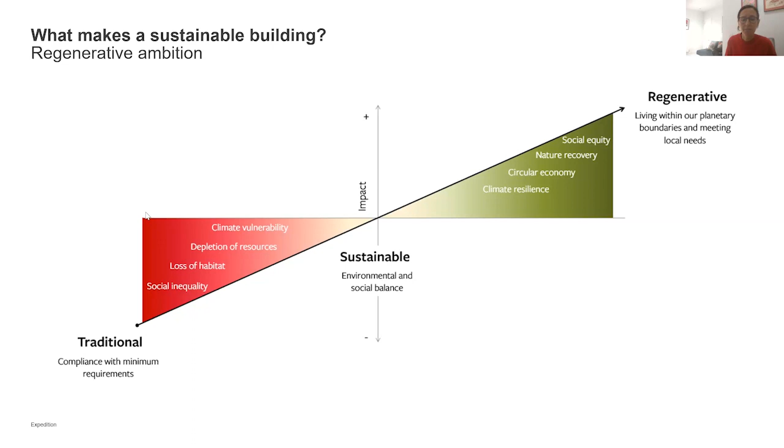those attributes in practice. And yes, we had a great design, but we also had a really strong client that put sustainability at the heart of what they wanted to do and achieve through this building. We had the funding in place to enable us to do it, and we had the local environment and the local conditions as well. We then had a really good contractor as well that built the building in accordance with our design intent, and that was supported by a soft landings process where we had the asset owner engaged with the design, and we had very good commissioning processes.

And if you go into the building today, it does perform pretty much as we had envisaged, and it's low carbon. It performs even better than we expected. But it was also delivered in a different era. And I think one of the points that I wanted to make now is, in some of the discussions that I'm having around new projects, we're being increasingly pressed on cost pressures, on procurement pressures. And so how do we make sure that we can continue to design and deliver sustainable buildings in the current economic and geopolitical climate? And I'll give you an example of a project.

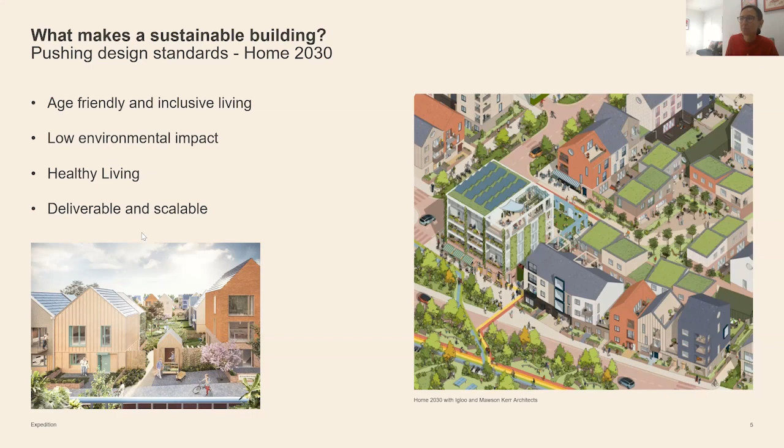And so we came up with a proposition which by far meets the Future Homes Standard and is very much aligned with things like LETI, which are the industry view on what energy performance and embodied energy should look like in 2030, which you may be familiar with. We were fortunate to win that competition, along with another team, and we're now in the process of building those prototype homes within the context of Riverside, Sunderland. It's a master plan which is regenerating the city of Sunderland, and this will go into the first phase of

development. But it's only when the rubber hits the road, when you get into the procurement process, that you start to understand how these things are going to be delivered. And we've encountered some issues on the way, translating our design intent into a built product. And those issues are to do with making sure we've got the right product insurance certifications, building insurances. We've had some cost issues as the cost of materials and the cost of living more generally has gone up that we're now having to work through.

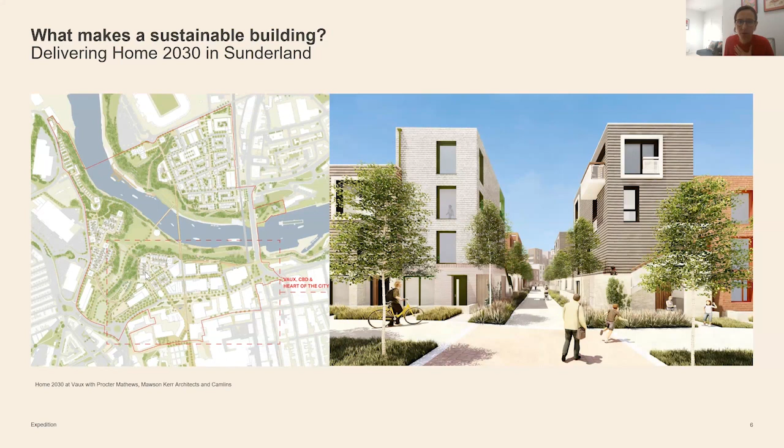So whilst the subject of this presentation is about design of new buildings, I think as a good designer, you have to think about how each component of your building is going to be delivered. And then the other point I wanted to make in the context of the Home of 2030 in particular, but more generally about buildings, is buildings can only be sustainable when you think about the wider context as well. So that infrastructure strategy, how people are going to get to buildings, the sort of blue-green infrastructure that needs to be provided, the community infrastructure, the energy infrastructure.

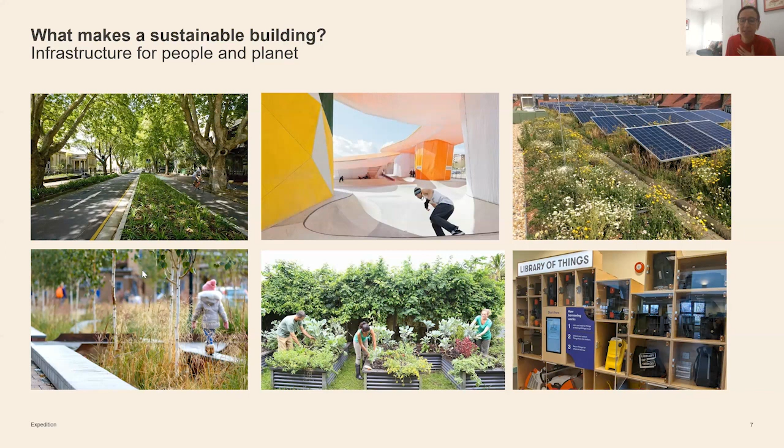So I think I spend a lot of my time actually working around things outside of buildings to make sure that the people who live in those buildings can live sustainable lifestyles as well.

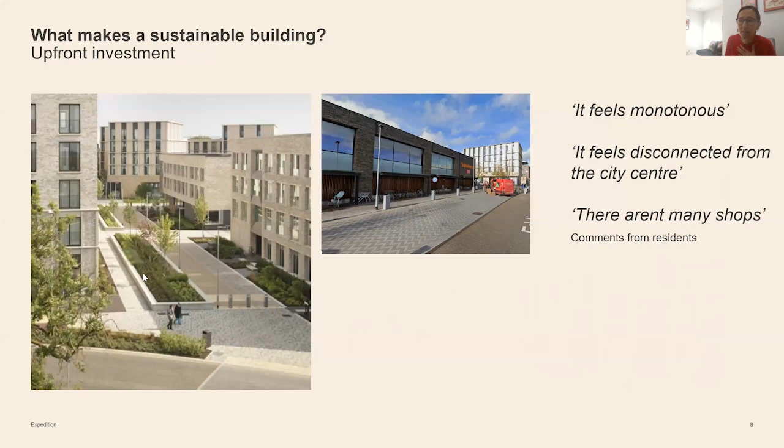I've used this as a case study, I've tried to anonymize it, but we did some research for a new development, and we looked at some case studies around that development, and you can sort of see from the comments that we gathered up from social media that places can take a while to establish. So there's also something about your meanwhile strategy and upfront investment into community facilities to get communities established as well that has to be thought about.

And then I just want to end on something about our existing building stock. Most of the buildings we know are going to be around in 2050 already exist today. This was a reflection of the work that we're doing in Sunderland, and as part of the new master plan there's a new city hall, but that city hall has replaced a civic centre which was built in the 1970s by Basil Spence, which replaced the original Victorian city hall, which was built at the end of the 1800s. So over the period of around 100 years, we've had 3 new buildings doing the same thing.

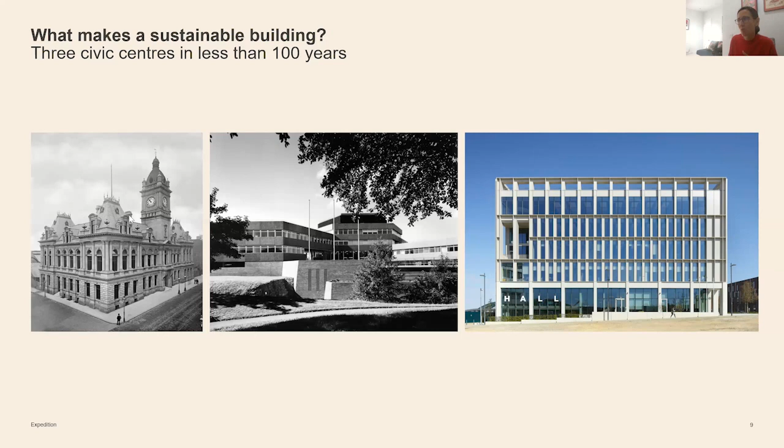And whilst that repurposing, reinvigoration, reimagining of cities has always been part of how we've evolved, the loss of materials and the material economy that we're facing now, it really struck me that it is quite significant, 3 buildings in that time period. And there's a lot of value in our existing building stock. And so I think for me, sustainable building also looks at adaptive reuse and retrofit to meet our future needs and bring existing assets up to the needs of the 21st century.

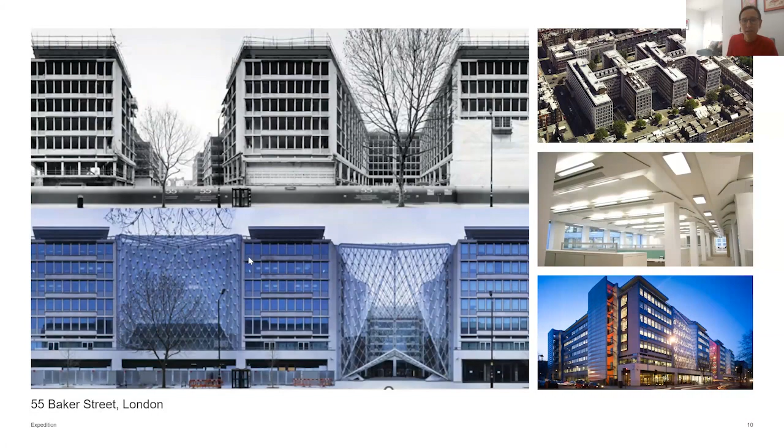Perfect. Thank you, Judith. I think a fantastic introduction, and thank you for what was a great presentation. I think that lens of regenerative ambition that you opened us with was a great way to open the discussion. Hopefully it's something that we can pick up on as we get into the questions a little bit later on.

What really struck me from the presentation was the UCL Student Centre case study and the importance of having strong contractors, strong delivery teams who got what you were trying to achieve and bought into that ambition. So as we go on, I don't want to forget those process elements, which can be barriers or potentially even drivers for some of these sustainability aspects that we want to achieve. So things like the procurement, the insurance, the infrastructure strategy, all of which could be make or break. But I think a great way to start us off, so I'm looking forward to seeing where that goes in the discussion.

But as we continue, our next speaker is going to be Matt Whitney. Matt, as I said earlier, manages the Oxfordshire Local Nature Partnership. With a background in renewable energy, sustainable transport, and non-financial corporate reporting, Matt brings a broad perspective to his current work, which seeks the systematic integration of nature-based solutions and nature recovery into decision-making across all the policy spheres. Matt holds an MSc in environmental management, during which he focused on approaches to facilitating collective action amongst farmers and landowners to deliver landscape-scale environmental benefits. Currently focused on developing a county-level framework for nature finance. So a whole range of interdisciplinary expertise that will be brought into this conversation. Matt, over to you.

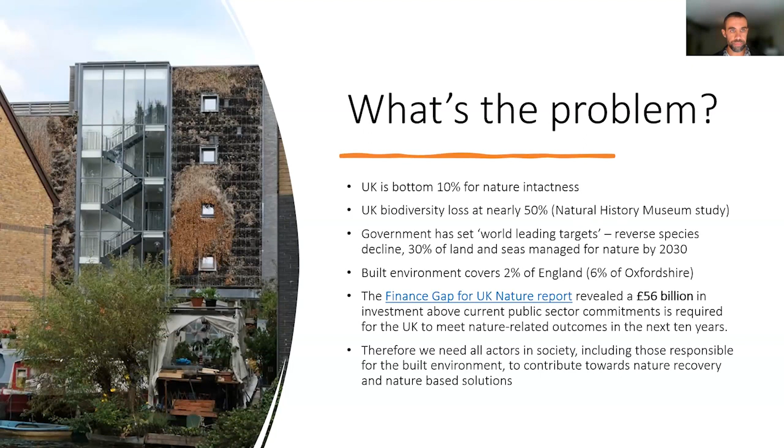Natural capital, I think, gives us a useful lens for understanding how nature can be incorporated into different policy areas. So this is kind of an economics frame. I was interested in the kind of language you used, Judith, about regenerative by design and earth overshoot, which I don't know if that's doughnut economics language, or certainly it sounds similar.

And the earth overshoot is very much what I've just described in the previous slide, and that economics frame follows through this natural capital process where we consider assets and then flowing from those assets are ecosystem services, that are the benefits essentially that society and the economy get from nature, which obviously have value. So I'm going to focus on those ecosystem services aspects of that.

What does nature do for us? Well, nature provides us with a number of different services. For instance, nature can reduce flood risk, and it does this for free, essentially. If we don't use nature to reduce flood risk, then we have to pay to build things that will reduce that flood risk for us. Nature can clean water. If we don't use nature to do that, then we have to pay to clean water in other ways.

Nature can regulate local climate by reducing the urban heat island effect. And again, if we don't use nature to do that, if we don't build nature into those built environments, then we have an increased energy demand for air conditioning to reduce temperatures in buildings.

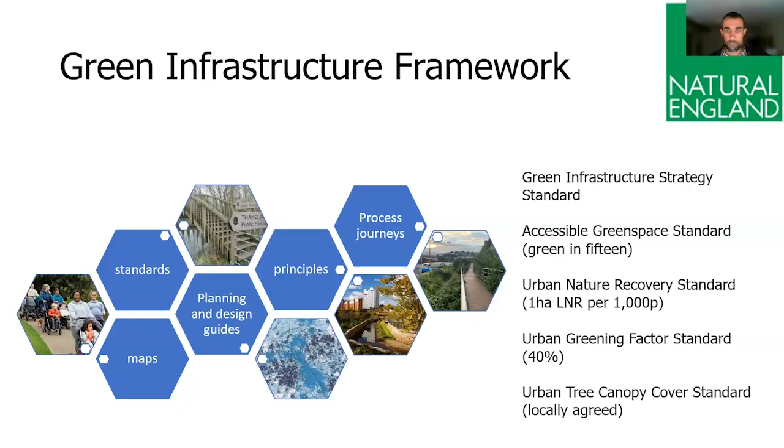Another thing I'll focus on is BNG, which has been in the news a bit recently. So biodiversity net gain is an approach to development and land management that leaves biodiversity in a measurably better state than before. If you want to build some houses, you've got a green field to start with. The green field might have 100 units of biodiversity on it. By the end of the development, so by the time you built all the houses, that green field, that site needs to have 110 units of biodiversity on it.

If it doesn't, if you can't fit in enough biodiversity to enhance the nature that's on the site by 10%, then you have the possibility to pay for biodiversity uplift off-site, which are biodiversity units or biodiversity credits, essentially. Biodiversity net gain was initially conceived as a policy mechanism for improving the green infrastructure in those new housing developments. But it also has the potential to contribute to nature recovery more broadly through this off-site allocation. So I think I've got some stuff on that on the next slide.

Yeah, I'll give you a bit of context of the Oxfordshire biodiversity story. We've been doing biodiversity net gain for nearly 10 years. Trust for Oxfordshire's Environment have managed much of the biodiversity offset market in that time, and they've delivered over £1 million worth of biodiversity offsets. We've got a wildlife trust who set up a habitat bank, which has a number of biodiversity units for sale.

Through Chris's involvement as chair of the professional body for air quality in the UK, the Institute of Air Quality Management, or the IAQM, vice chair of the Chartered Institution of Building Services Engineers Air Quality Working Group, and council member of the Institution of Environmental Sciences, the IES, that's us, he aims to improve and is passionate about harnessing the value of air quality through the design and operation of buildings. Chris is a chartered environmentalist. He's a member of the Institute of Acoustics, and he's a full member of the Institute of Environmental Management and Assessment, as well as, of course, a member of the IES and a full member of the IAQM.

So, Chris, over to you. Thanks, Joseph. That's great. Well, quite a tough act to follow, but I think Judith and Matt have set the scene really well. So it makes my life a bit easier because I can just reference back to you guys throughout. I'll try and keep it brief so we can move on to the discussion side of things.

Designing sustainable buildings, I'm covering the air quality aspect of it really. From my perspective, I'm going to focus a lot on the health side. Before I start talking about some general thoughts and perceptions around indoor air quality, a brief overview of the current position where we're at as an industry and as a society, definitely in the UK. I'll keep it to a UK focus for now.

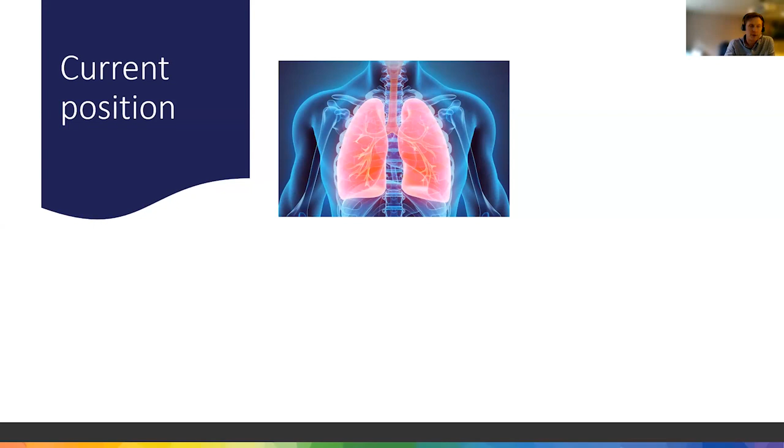When we're talking about legislation, legal drivers, regulations in terms of what we need to meet in indoor air quality terms for the health of the people who spend time inside buildings, which is pretty much everyone, there's very little there, and it's quite absent. We have some in building regulations, but it's pretty lacking overall. At the minute, it's left down to best practice, accreditations, certifications, bodies like that, to pick up the slack.

We know that buildings have a key role to play in our health and well-being, and they offer the potential to provide improvements, not just from opening windows and managing your cleaning products. They can offer some real innovations there. So they're crucial as part of that. We spend a lot of our time indoors. Nearly 90% of our time as individuals we spend inside buildings.

During pandemic times, we spent a lot of our time indoors. Again, more recently in the summer, for a few weeks back in July, I think it was, there was a sustained heat wave and people were taking refuge in buildings again, using them as a safe haven. I was sealing myself in my house with windows closed, curtains closed to try and manage overheating. So again, buildings were coming to the rescue.

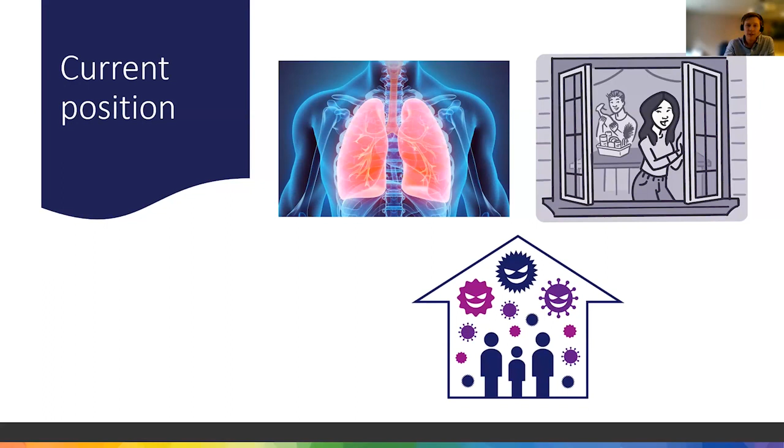When we look at our indoor environments and try to manage our indoor air quality, it also offers the opportunity to manage other aspects of that environment, viruses being one of them. So there's benefits around taking better control of our indoor spaces. Really it's about awareness, and awareness has improved and is growing, but awareness is very different to actual understanding and action. People, particularly post-COVID, are definitely more engaged with their indoor spaces.

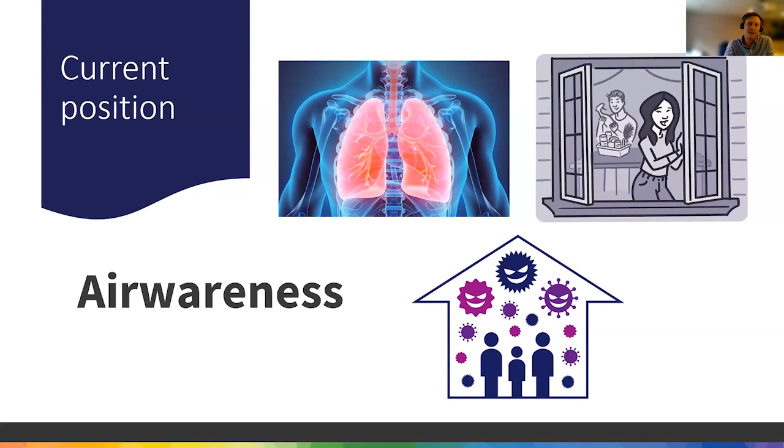People understand now that they breathe, and that they can have some level of control over the invisible pollutants and elements inside the buildings where they live and work. What they can do about that, what's good, what's bad, is a different question, and that's where I think we need to step things up.

So we're really at a bit of a tipping point in terms of a revolution in indoor air quality, both from the kind of policy driver, public perception side of things. People, like I said, are engaging with the fact that they are inside for a lot of the time. You know, again, particularly moving into winter now, we'll be spending a lot of our time in buildings, whether that be in the office or at home or gym or library.

And the indoor space in our buildings really offers an opportunity for us to take control of our climate, unless we're going to be sort of wearing regulators and scuba gear when we're walking around outside. The indoor space is that one place that offers us an element of control over the quality and the health of that space and what we can do.

And we're really seeing a change and things becoming a little bit more mainstream now. I know there's a lot more BBC News articles about air quality, and talk about indoor air quality now seems to be a weekly occurrence, and that's outside my sphere, where I hear about air quality all the time, but even in the mainstream public media, which is a definite shift change, which is where things need to be.

As with anything, there's a tension. So when we're talking about delivering this sort of utopian view of the healthy indoor space, how healthy we can take it does come at a cost. So how much we want to invest in a space, how much capital outlay in terms of equipment to improve that space, to make that space reach a certain level that we deem acceptable, comes at a cost.

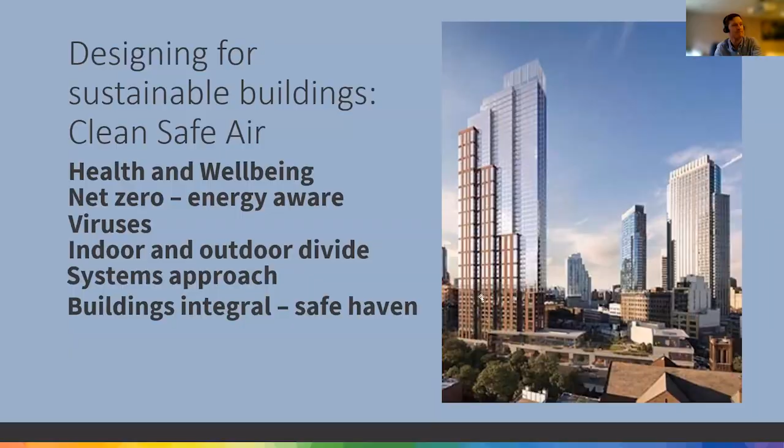I think you did an excellent job of explaining those key elements around collaboration, understanding, and particularly those co-benefits, which really cut through the presentation for me. All the way from that example of how COVID engaged people with their indoor spaces, which opens the door to, well, when you're doing something with the indoor space, it gives you a chance to make other changes, which is naturally the vital point for bringing together all four of these presentations into something a bit strategic in our decisions. So I think you gave us a great holistic, almost systems perspective on those issues and how we bring things together across disciplines to make indoor environments which are clean and safe without being to the detriment of nature or climate or these other considerations. And I think that idea of simple, smart management decisions is a great way of thinking about that.

So thank you, Chris. And on that note around climate and decarbonisation specifically, our fourth speaker is going to be Catherine Pinney. Catherine has worked in the construction industry for more than 20 years. She has experience in the many varied aspects of sustainability and environmental management on development sites in both the UK and overseas, and has previously worked in construction, consultancy, regulation, and research roles. She's both a chartered engineer and a chartered environmental manager, and sees much of her role as translation between these two disciplines in order to maximize environmental benefits. So we're picking up on that idea of different languages and translation again already. As Decarbonisation and Environment Manager for Treveth, Catherine now has responsibility for delivering the strategic environmental aspirations of the business through a carbon reduction strategy, sustainable design, social impact assessment, and biodiversity net gain on Treveth's residential and commercial development sites in Cornwall. So Catherine, over to you.

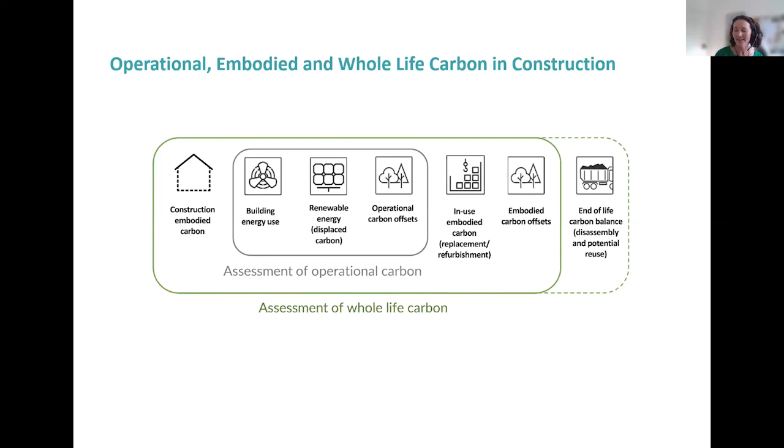And then there's also things to consider at the end of life. So is that building to be demolished? How easy is it to be demolished? Can you reuse the materials in a different way? So it is quite a complicated thing to think about. And as an industry, I think we are just getting to grips with this. And there's lots of work being done in this space at the moment.

I just wanted to tell you a little bit about what we're doing to cut our carbon emissions. So as a business, we have a policy of no fossil fuel use, full stop. So our properties come with air source heat pumps at the moment. And we're also looking at other opportunities, looking at ground source heat pumps and microgrids in the future.

We're looking at 2030 whole life carbon targets, and we've looked at the RIBA 2030 standard for that. One of our largest construction projects at the moment is called Tolgus, and that's based in Redruth, and all our properties there are EPC rated A properties, which use between 56 to 73% less energy. And we've calculated that on a comparison with existing EPC C rated to EPC F rated properties. So the feedback we've had from tenants is that they really like it. They're using a lot less energy. They are very efficient homes, which is great.

We try to use local construction and materials wherever we can. And following on from what Chris was talking about monitoring, we're also conducting some post-occupancy monitoring. We've got some energy monitors in place at Tolgus that we're using to see how the buildings perform and where the main energy is being used, and how it links in with our PV panels and air source heat pumps. So it's really useful feedback for us to take forward into our future design work.

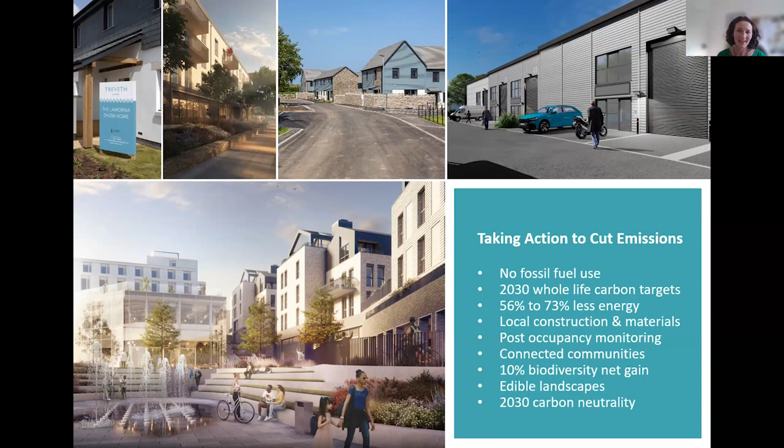I wanted to talk a little bit about standards and verifications. So we have standard designs now that we've developed over a number of years for our houses. But these are looked at for each individual site again to see if they can be optimized or to see what else we can improve on. We've worked looking at Green Building Council frameworks and also the LETI standards that Judith mentioned earlier. And we've also worked to the RIBA 2030 Climate Challenge.

More recently, we've worked with the UK Net Zero Carbon Building Standard, which is a new standard that's being developed at the moment to try and standardise this across the industry. And we've submitted some data into that process. So hopefully, I think that the output of that is due towards the end of this year. So as a construction industry, that will be really interesting to see where that takes us.

As a business, we've undertaken some carbon literacy training for all of our staff through the carbon literacy training framework, and we're also in the process of undertaking an impact study with a business called The Good Economy. And most recently, we've become a certified B Corp as well, which we're very pleased about and very proud of. So it just kind of shows the direction we're coming from.

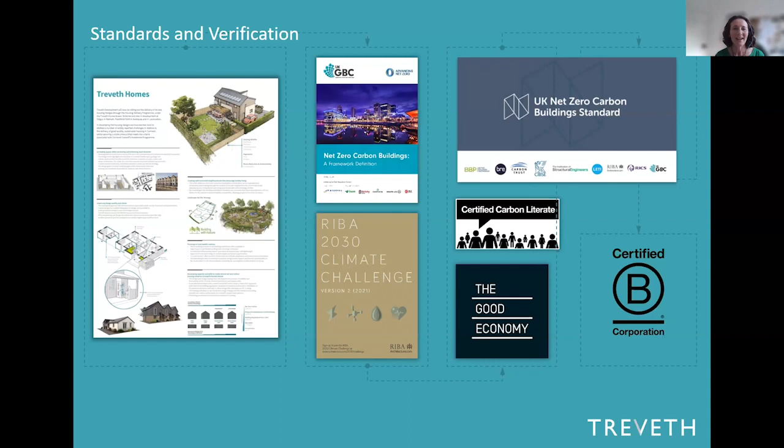And this is more about the direction we're taking. So in order to work out what strategy we need in terms of decarbonisation going forwards, we've established, or are in the process of establishing, our greenhouse gas baseline. And to do that, we've looked at the ISO 14064 categories, and we've remapped those against what we do and how we do it. And we're in the process of collating data to determine this as a baseline with the

University of Exeter. So from this baseline, we can then use it to work out a strategy to go forwards, to reduce carbon in key areas of our business, what we do, how we do it, who we work with. So again, it's a really useful tool to monitor where you are and where you should be heading. And then after we've done that, we are obviously going to have some residual carbon emissions.

And linking in with what Matt was saying about biodiversity net gain. In Cornwall, we have a requirement for biodiversity net gain of 10% that has been in place for well over a year. So yes, we do that on all of our developments. And we also now have a requirement for a 15% canopy cover, which is the new Cornwall Council policy. So our development sites very much look at this and how we integrate this within the development wherever possible.

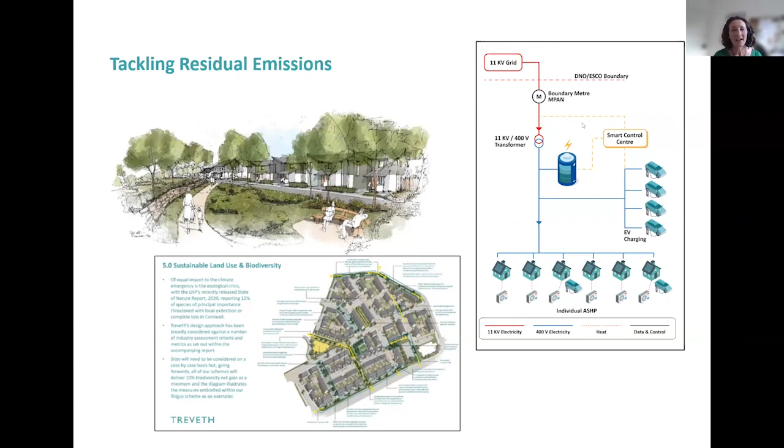I just wanted to give you a couple of examples of what we are actually doing on site. Park Lanneves is in Bodmin, by the hospital there, if anybody knows it. It's a residential development, and we've achieved some significant carbon savings working with a local ground contractor there. The original scheme had a lot of groundworks required. There were a lot of level changes on site, and we've managed to completely redo that.

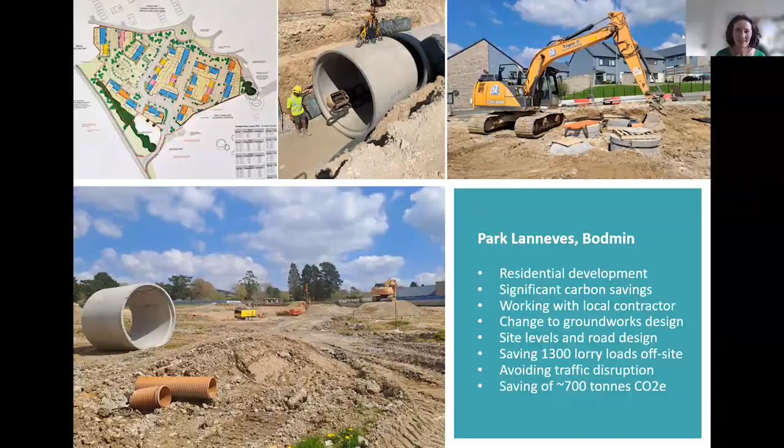So another case study I just wanted to float, and this touches on Judith's comment about reusing buildings actually. This is one of our commercial developments. It's in Pool, and there was an existing building on site, and instead of knocking it all down and starting again, we decided to retain the existing foundations, slab and steel frame, and we treated the steel frame and recoated it, and then we've used some new cladding and provided a new space which is being let now, and again, this has saved over 100 tons of carbon, we estimate. So it's a good example of what can be done without having to start from scratch.

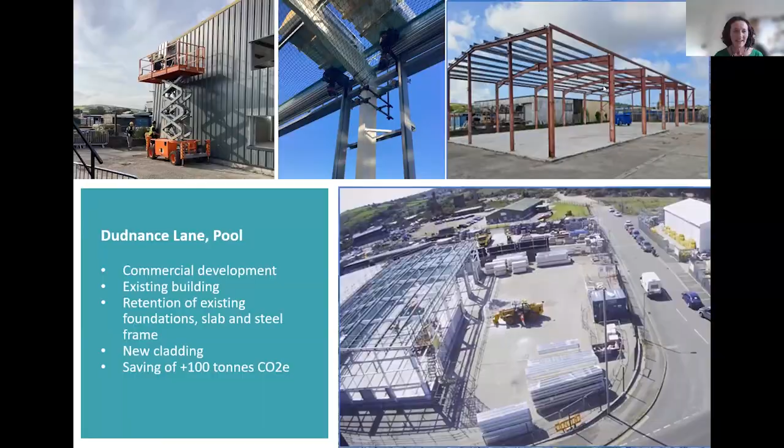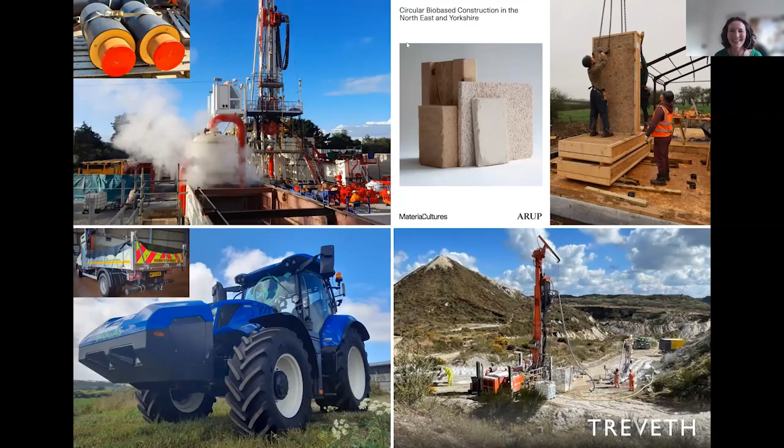Perfect. Thank you, Catherine. That was another great presentation. I think it was a really strong overview of how many different considerations really come into this decarbonisation question, from the baseline fossil fuel use and the energy, which people might be a bit more familiar with, to the connected communities element, which is really important, because if you don't consider it, then you're potentially missing the chance to create these decarbonised communities from the outset.

So it's great to hear about all these different standards and guidance as well, and the roles that they play in facilitating good decisions, all the way from data through to design, all of which we need to do to support decarbonisation and biodiversity net gain. But despite that challenge, you brought all of those elements together in a way which does make it sound very achievable, which I'm sure will be a comfort for colleagues on the call who are hoping to copy your homework in their own projects in the future, maybe.